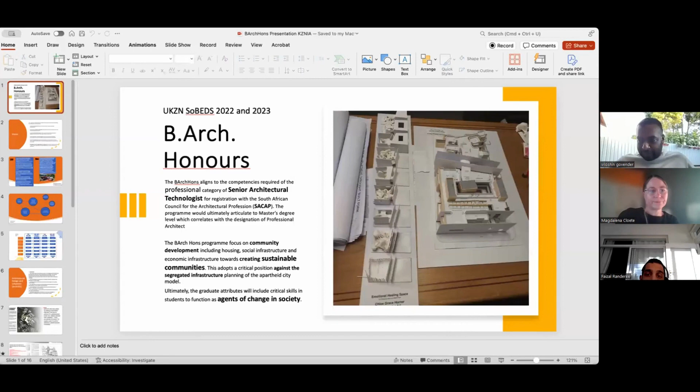Can everyone see this? Yes. Thank you, I'm sorry, my dogs are barking in the background. Good morning, everyone, it's nice and early on a Friday. Just to introduce this, we developed a program for honors before COVID, and then we were able to implement it in 2021.

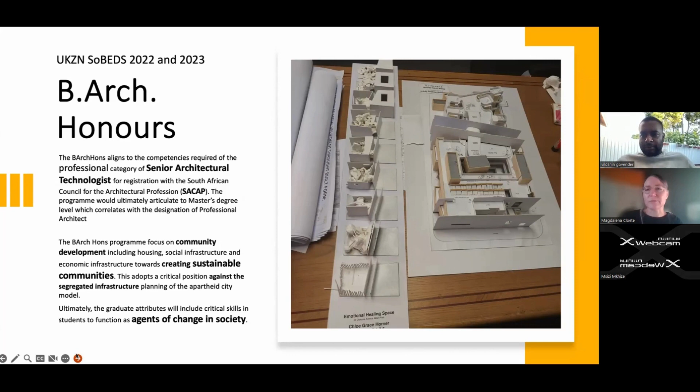I think what stands out with this program is it's got a very distinct research-driven approach, as well as trying to work towards sustainable communities and also preparing students for becoming agents of change in society, so not just being an architect that makes money, but actually creating change.

So the vision of the program, looking at all the modules and seeing how we fit into the university - African scholarship is quite a strong element at the university. So we encourage research, we look at literature and policy, we support critical scholarship, we promote access, specifically trying to accommodate previously historically marginalized communities, not just in access to the university, but also how we engage with them.

We promote collaboration, and most recently we collaborated with the city architects - not just the city, Mile and other people in the city - as well as working with some of the engineering programs. And then I think it's about being innovative and finding new ways of engaging with our built environment and trying to work towards that bottom-up approach that Villa was talking about as well.

So this is a little bit more - it explains how we work, and I think one of the main things is that it's not us teaching students, it's very much we learning together, learning with our communities, learning through research and finding the information out there and bringing it back. Quite often students would use what we call a flipped classroom, where they present the work to each other, so it's definitely not a lecturer-centered approach where we are always teaching them - we teach each other and we learn through that.

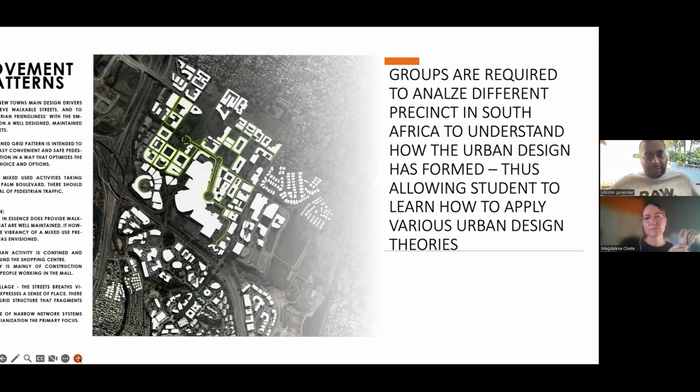Then we start splitting them into further groups when we give them a site area, and we start mapping at various scales. What we found is that mapping at various scales allows the student to understand the context even better, from macro, meso, and micro scales.

Some of the contexts we've worked in are the Point Precinct, Warwick Junction, and Giba Gorge. Now we're doing West Town, which is interesting because we're looking at a developer-driven approach to creating a city, allowing students to understand that approach and shape the city to what they think is correct. We're doing this in collaboration with engineering students, and at the end we'll probably invite those developers to studio to show them our approach to urban design, and contrast the pros and cons of both.

The mapping at various scales allows us to critically analyze context and get information which is often secondary, but we mix it also with primary research by doing transect walks. This information is useful because it also forms part of the body of knowledge which we can publish about our city.

From these mapping exercises, we get something called the design drivers. After they collect the data, it's important that students realize how this informs design. Design should be informed by the drivers that come from the research, and it's not something you download off Pinterest or find online. It's really context-driven, responsive design solutions.

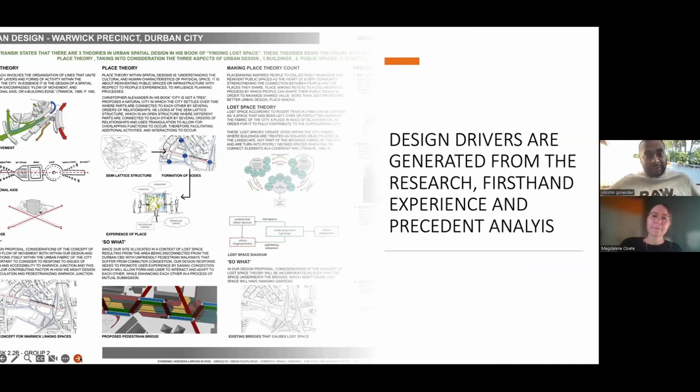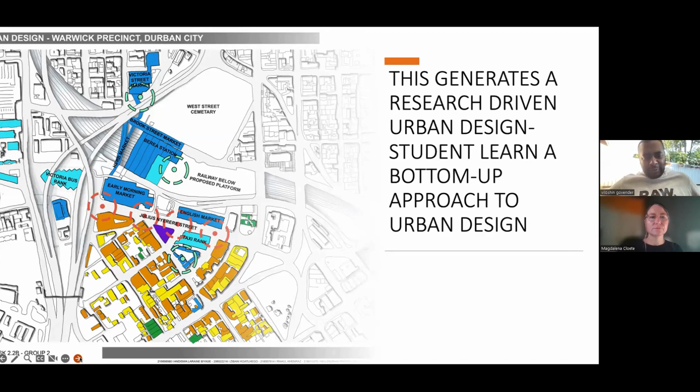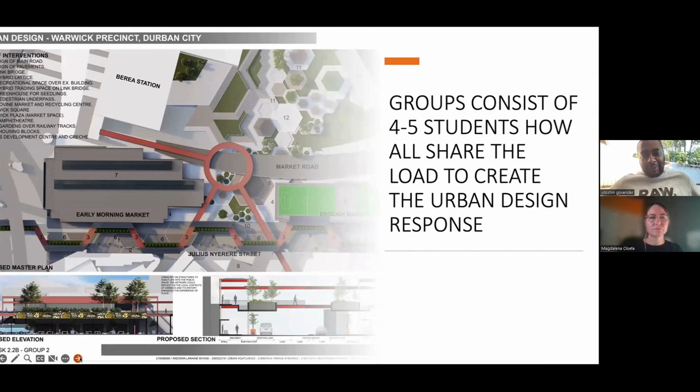Then the students use these bottom-up approaches to design an urban intervention. This is done in groups of 4 to 5 students, and they create urban interventions for the context. Some of them are quite broad and quite big interventions, but we allow them to explore and try new ideas.

And this is the urban design—some examples of when we were working in Warwick, and some of the solutions they came up with.

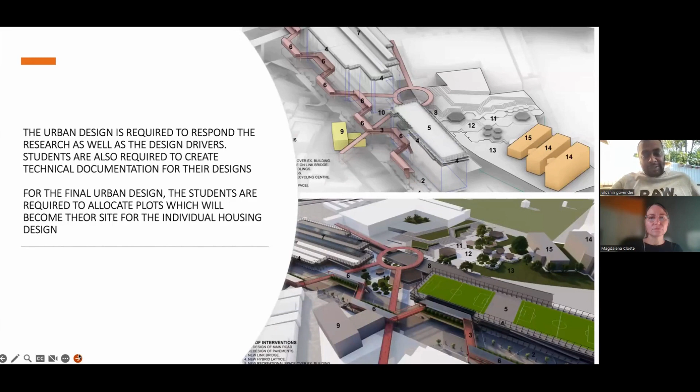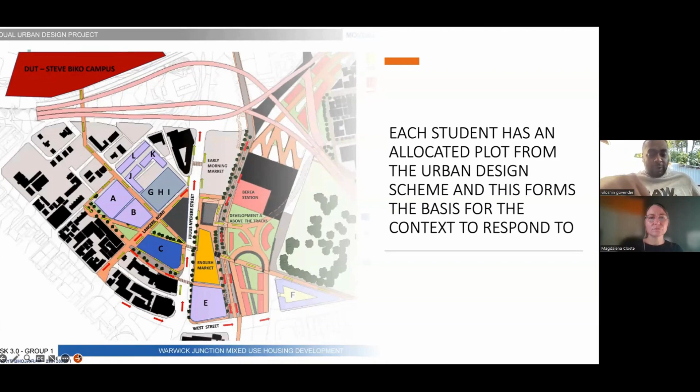From this, the students have to design their own plots. What happens is these plots become the individual response they take forward as the next project, where they do a housing solution on the plots they've designed. The individual design refers back to the urban design they've done as a group, and uses the same research and synthesis found from those solutions.

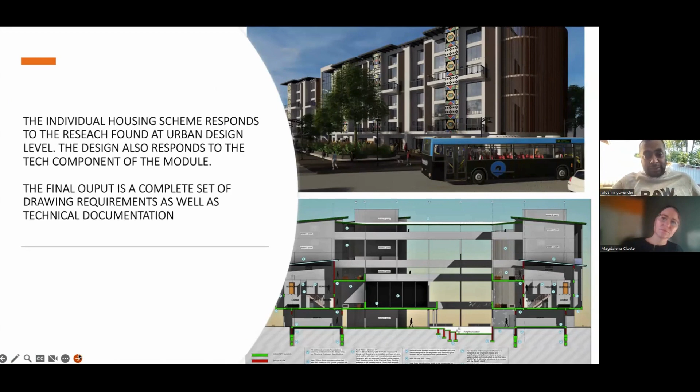The part-time class also follows the same kind of program, but we spread it out over 2 years, because it's part-time.

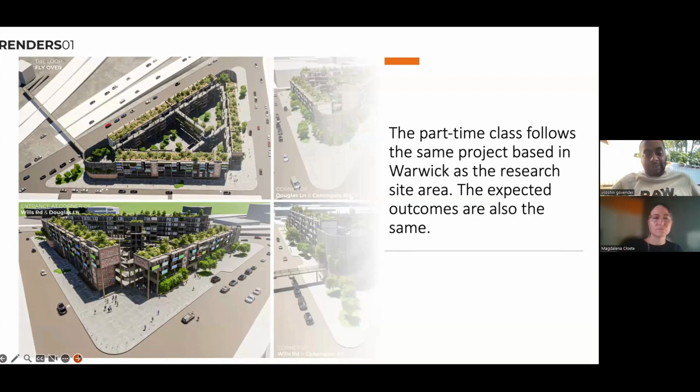Before we move on, I just want to quickly talk about a specific project. Some of our younger architects came through the Masters 1 program—Vilo, you also did a very similar project, which Dr. Bridget Horner had started. The focus was very much on how you engage, not to always just read up; as visual people, by drawing plans by hand, you learn so much more. I inherited the project from Bridget, and we've integrated it into this new program. This year Vilo joined me in the module—it's part of the history and theory of architecture and urbanism course.

The focus this year is on African cities, but we've approached it in different ways. We'd focus on, okay, it needs to have a water's edge or a strong connection to a river or something like that, and then start to look at how the city developed in relationship to that. In African cities, the colonial influence becomes quite strong.

Through the mapping you will see what they've done. Those of you who have been to the Institute and looked at the drawings would also enjoy that. The last 2 years, Rodney Harber was our external, and it was amazing—the first year he joined, he'd been to all the cities and could really engage so well with the students. I miss him when we do this project now.

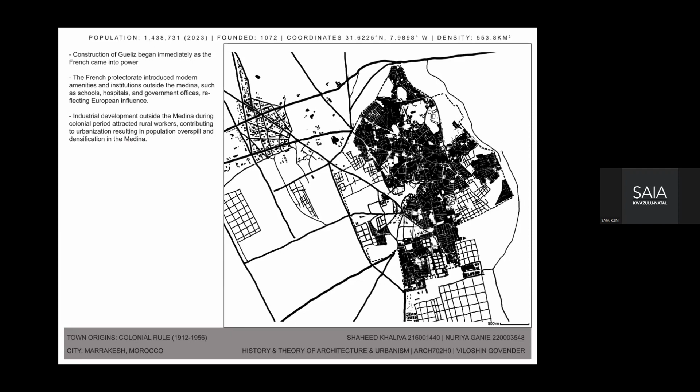Moving into the colonial era: the French introduced modern amenities within the Gueliz, such as schools, hospitals, and government offices, reflecting European influence. The regulations the French put into place restricted development within the Islamic city center, creating lasting segregation between the French and Islamic communities.

That segregation is evident in the contrast between the organic Medina and the very ordered spatial structure of the Gueliz. The urbanization and industrial development taking place just outside the Medina attracted high volumes of rural workers from other parts of Morocco, creating severe densification and population overspill within the Medina, resulting in housing shortages. In response, much of the farmland along the Medina perimeter was converted into informal housing areas known as douars by the big landowners at the time, which further exacerbated social stratification.

Within the early stages of Moroccan independence, much of the focus was placed on restoring and developing the countryside. During the modernization era, there was major infrastructure expansion as well as modernization within the Medina, aimed at encouraging more tourist attraction, converting many homes into hotels and more commercial services. This also came as a result of that population spilling over into the west.

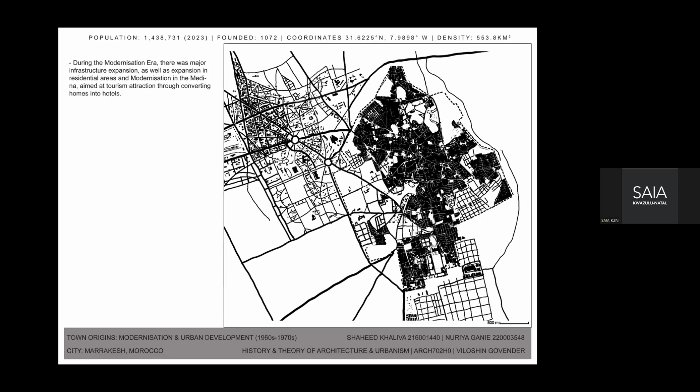During the globalization and modern era, that development towards the West becomes more apparent. Despite the creation of a new town at the fringe of Marrakesh, the urbanization front begins to develop from north to south. Within the Medina itself, you get problems of traffic congestion and social issues systematically undermining both the centrality and attractiveness of the historic core as a place of residence and tourism.

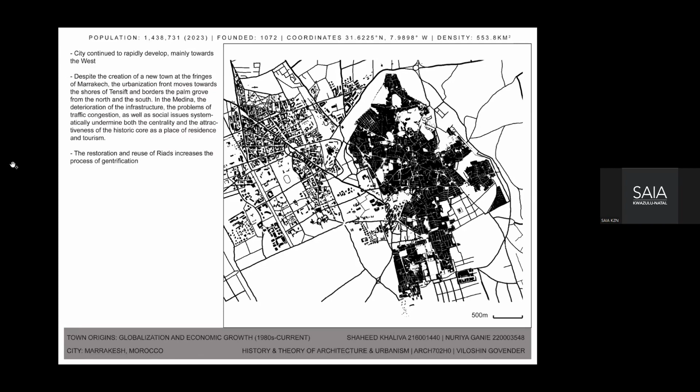With the establishment of French rule came the implementation of basic transport infrastructure such as roads and railways, primarily for strategic and administrative purposes. The expansion of the road network begins to show the apparent influence of French urban planning, contrasting the Medina, with the introduction of motorized transport into the center also further influencing urbanization of the Medina.

The Gueliz expressed this radial road formation, with the roads used as linking devices between public nodes, which is a general characteristic of French urban planning.

Towards the 60s, you get rapid urbanization of the Medina, which created severe traffic congestion issues within the city as a result of there being very minimal circulation beyond the confines of the ramparts. Whereas the Gueliz experienced not much development in this time period, as much of the road network was already basically established at this time.

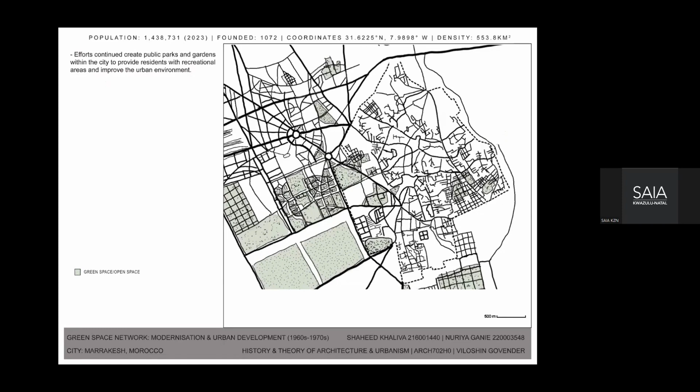In order to further improve their urban environments, more efforts were made by creating public parks and recreational areas for the residents within the city. You also see the emphasis on rural development through agricultural land, as expressed by the map, where you see large areas of agricultural land in the lower areas of the Gueliz.

Moving towards the modern era, you start to see these gardens within the Medina become reduced in order to facilitate more accommodation and tourism. So the focus on green space now becomes more apparent on the outside of Medina, where parks become integrated within commercial and residential zones, becoming more of a beautification for tourist areas rather than for the actual residents. So it's further emphasizing the result of globalization within Marrakesh.

We concluded by isolating the town grain alongside these sketches to explain our interpretation and emphasize our findings in this presentation. The clearest point is the drastic contrast between the very historic Medina and the French Gueliz. Marrakesh itself boasts a very deep historic background with clear Islamic influence, as seen in the Koutoubia Mosque, which was built in 1150 and continues to stand as a historical landmark.

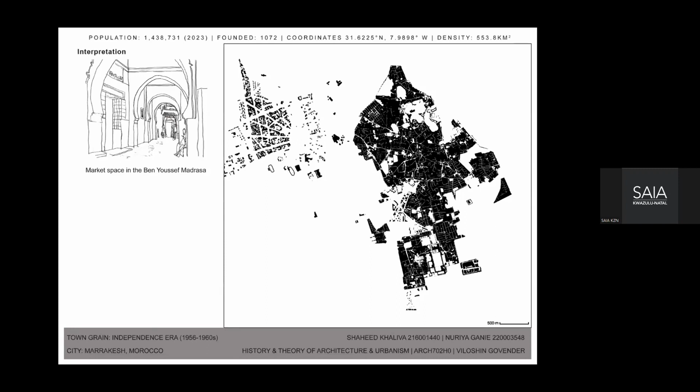Over time, the structured French urban development continued to influence Marrakesh, almost as a contradiction to their own cultural identity. Their response to the density of the Medina is what allowed them to create these iconic spaces, such as the market space in the Ben Youssef Madrasa, where you further see that Islamic identity through the use of arches and colonnades. Then towards the 60s, you start to see how the grain develops.

The Gueliz became more structured and rigid, with all development taking place on the outside of the historic Medina. In a way, this might have preserved the history of the Medina, if not for the severe globalization placing emphasis on tourism generation. So these historic cultural spaces start to become symbols.

That's something unique to Marrakesh itself, whereas the Gueliz is a clear contradiction to that history, showing the influence of French urban planning with clear lines and strong radial linkages. Whereas the Medina fully represents Marrakesh's historic background, it's that harmonious balance between the two that symbolizes what Marrakesh is today. Thank you.

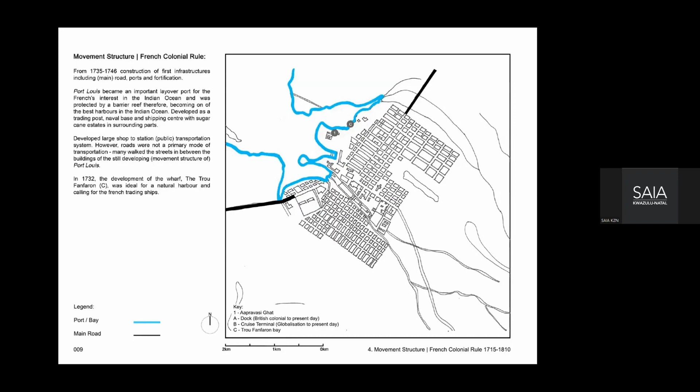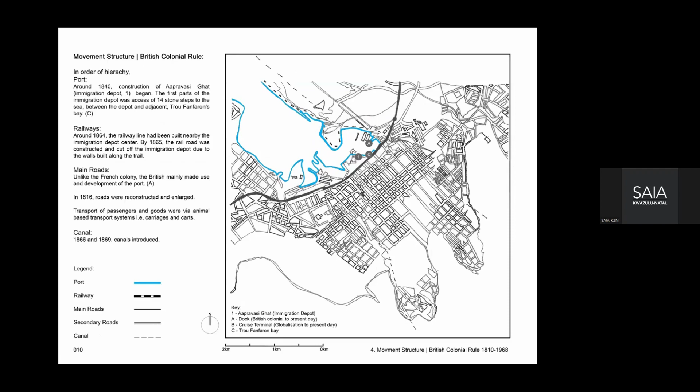Like the other groups, we're going to go on to movement structure. During the French ruling, movement was predominantly pedestrian friendly, not much growth. During the British ruling, other networks developed considerably, including roads, railways, canals, the port, and most importantly, adjacent to the port was the immigration depot.

Post-colonization, there were significant efforts in the development of the road network due to the introduction of motorized vehicular movement. Due to the growing significance of trade and commerce between Port Louis and its surroundings, rail networks developed as well, as an alternative to the port. Throughout history and present day, the port will remain of utmost importance.

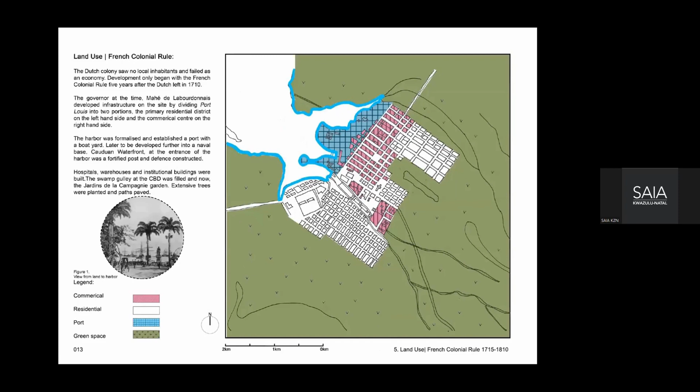Moving on to land use. The French and British, as you will see, similarly divided the city for residential to be on the outskirts and make use of the sloping land, and for the inner city where the flatter land is to be for the port, closer to the port for commercial.

In the British colonial rule, the city's layout was formalized specifically by Professor Thornton White's master plan, and introduced land use for the industrial area as well.

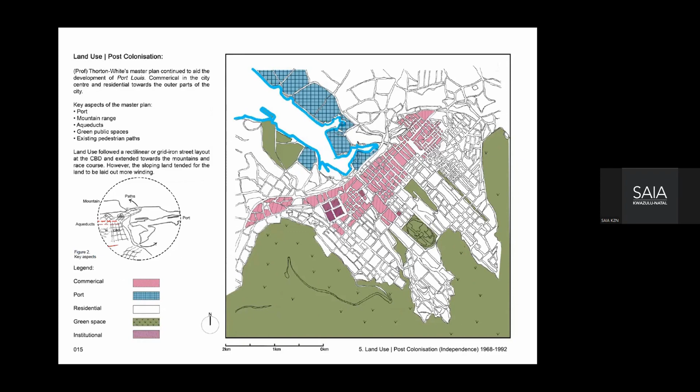Professor Thornton White's master plan continued to influence the city's layout as it developed into more of a gridiron pattern. The layout was influenced by significant and natural elements of the city as indicated by the sketch, namely the port and the mountain range.

By globalization and present day, the land use has become more traditional in the efforts to minimize the need for any or an abundance of mixed development. There is a lot of importance placed onto the green spaces being preserved, so there are pedestrian-friendly interfaces in the city.

Moving on to green network spaces, as previously mentioned, there was no significant green network during the Dutch colonial period. Port Louis's green space network slowly started to emerge during the French colonial era. Recreational amenities began to formalize and continued to develop.

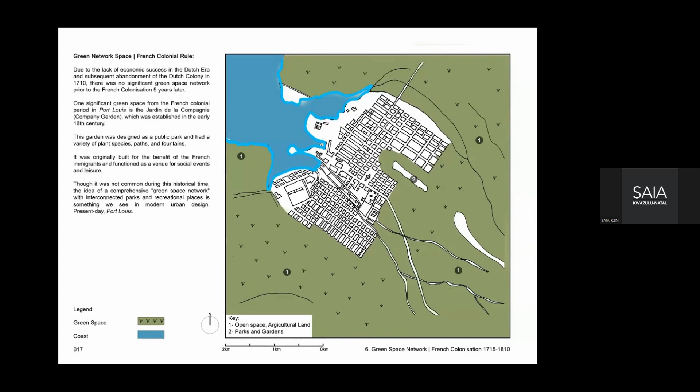With the rapid development of Port Louis during the British colonial era, there was significant removal of green spaces to accommodate urbanization. Simultaneously, conservation initiatives began to flourish.

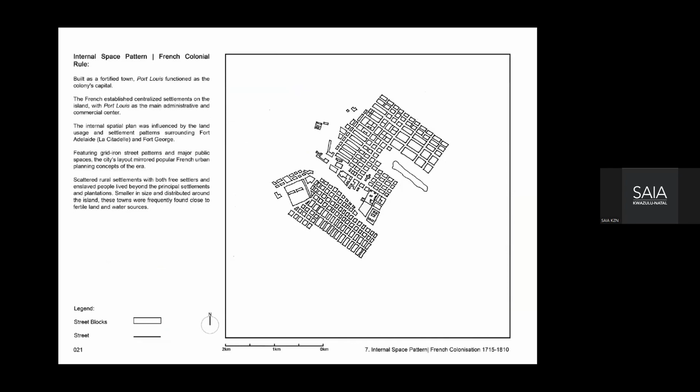Initially, Port Louis was built as a fortified city with a commercial core, practicing the gridiron street pattern introduced by the French. Rural settlement began to develop along the outskirts of the city, once again depicting hierarchy of a fortified city.

During the era of post-colonization, the city started to become highly populated, once again still maintaining the gridiron pattern. Existing recreational among other facilities began to redevelop.

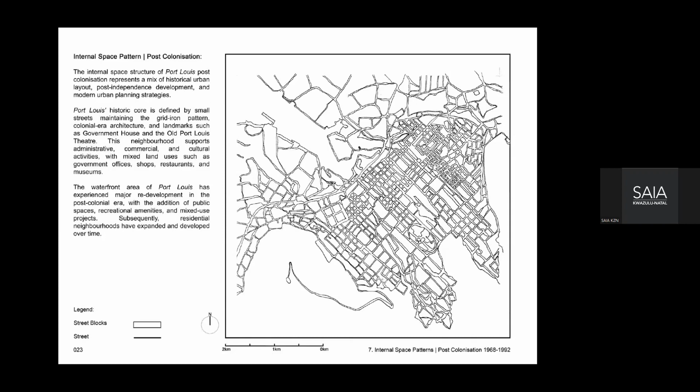Globalization drew investment to the city, allowing further redevelopment to occur. Modernized buildings began to emerge as a result of this economic change. One major factor that can be seen throughout this era is the gridiron pattern, which was maintained, and only impactful redevelopment occurred.

Now moving on to town grain, as mentioned, Port Louis was a fortified city. Therefore, many architectural features were developed to enforce this fortification, while observing a variety of land use initiatives to help generate economic activity.

Improvement to the city's infrastructure began during the British era, alongside new construction of roads, bridges, and public buildings. Due to the rising population in this era, residential areas expanded significantly to accommodate this.

Tourism began to emerge, causing economic growth for the country, resulting in the construction of hotels and recreational amenities near the coastal front. A large portion of the infrastructure at Port Louis after globalization is situated to accommodate tourism.

Following the timeline, the Dutch built Port Louis's first basic infrastructure, including small ports and agricultural facilities, but faced limited development due to their brief presence. The French built more infrastructure to support the sugar industry, including roads, irrigation systems, and larger plantations. The British continued to improve infrastructure, focusing on transportation and communication networks, connecting sugar plantations to ports and towns.

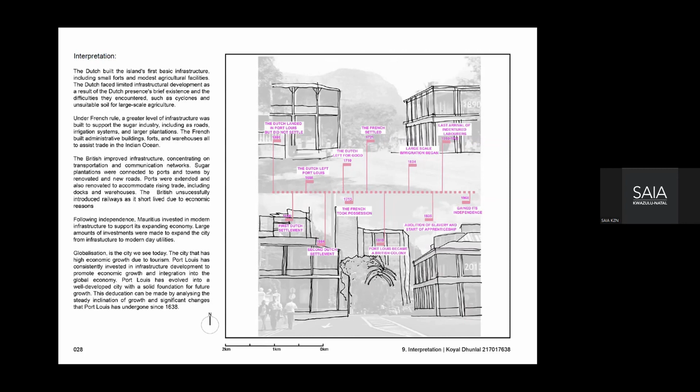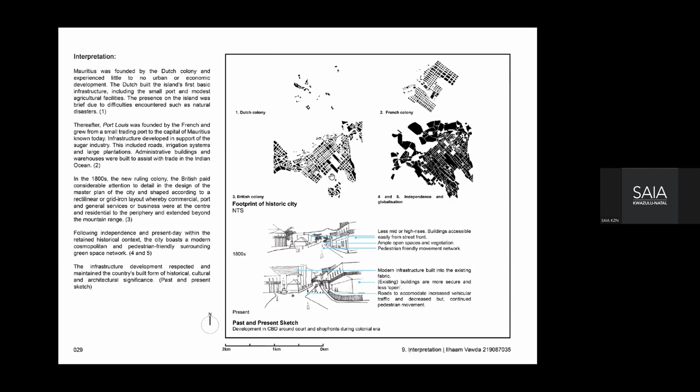Illustrated by the comparative sketches, Port Louis' evident investment in modernization has supported the preservation of its existing significant and historical infrastructure, such as the court or statues and other important artifacts that have been laid out in the city. Port Louis is now developed into a cosmopolitan and tourist hotspot that we know today.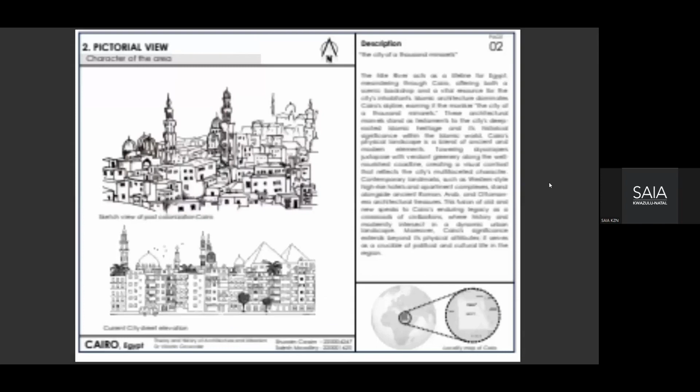Looking at the pictorial view, you can see that Islamic architecture was quite prevalent within the city, and I think it's been referred to as the city of 1,000 minarets, which are these long tower structures where the call to prayer is made for the mosque. This blend of contemporary and traditional architecture makes for a very interesting cityscape, which is quite fascinating about Egypt as a whole.

Starting off with town origins, during the colonial period, the British and French developed Cairo's urban fabric according to a familiar European style through grid patterns and strategic planning. This change was different compared to the more organic layouts based on location of resources used in ancient times. During the colonial period, the grid structure created more public spaces due to the lack of urban density.

As time went on, the urban density continued to grow, creating more housing and job opportunities within Cairo. For this reason, many people from the surrounding districts and towns moved towards the city. With independence came a more modernist approach, thus still following some of the Eurocentric trends.

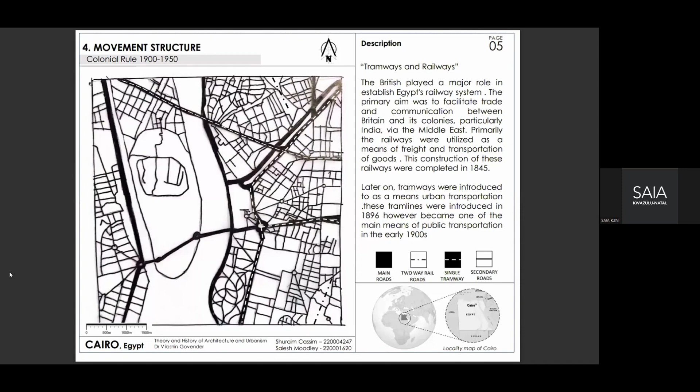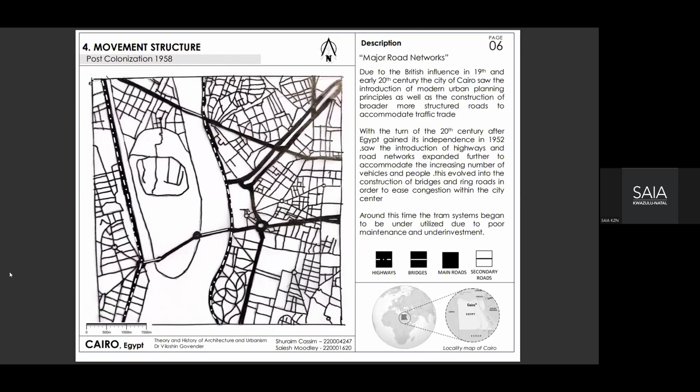Post colonization, the roads began to get more formalized and widened to accommodate this growth in population. Moving on, the globalization period in the early 2000s marked the introduction of the ring road, which connected the entire city together.

Due to space constraints, buildings started moving into high-rise typologies, and I think this also applied to the road networks, with elevating, looking at bridges and tunnels. These roads were developed and got more formalized and widened to accommodate the influx of people coming into the city. Now currently there's a movement to prioritize public transportation and walkability within the city, and that's where we are now with the current movement structure.

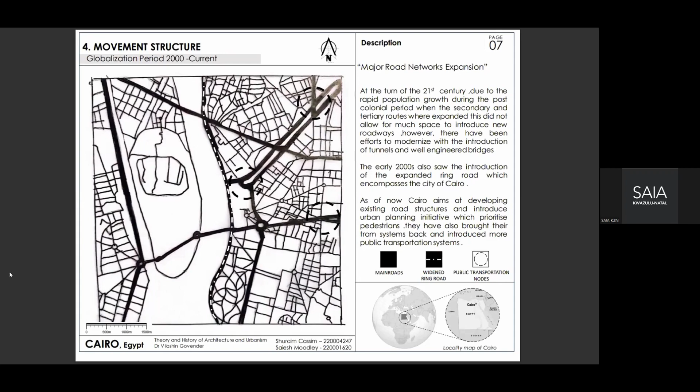So looking at land use and zoning, as previously stated, the colonial rule involved creating facilities that were more prominent in the European context. Many of these facilities were developed along the Nile for easy access and control. This created inequality, as the areas of resources were developed more for the wealthier ethnic and social groups.

Continuing through the post-colonial period, the urban landscape remained the same. During this period, Cairo and Egypt in general went through economic stagnation due to changes in government and other political influences. Building density moderately increased around the Nile, yet the surrounding areas were not developed further.

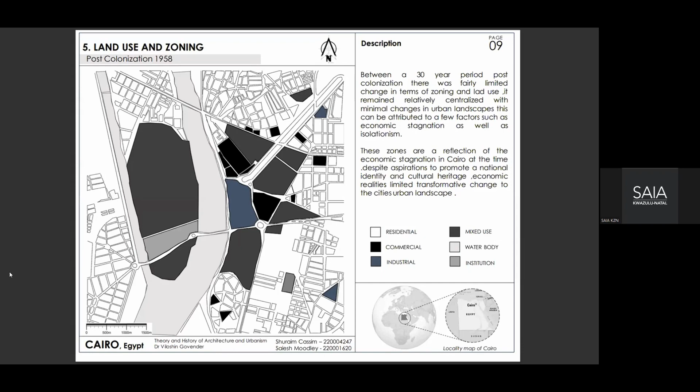A more liberalized approach was taken during the globalization period, allowing for the economic reforms the city needed. This further increased the zoning towards mixed use and commercial zones to cater for the population influx.

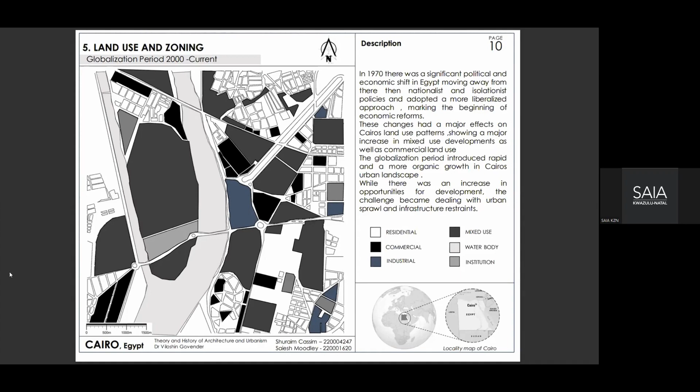Looking at the open and green space networks, it's quite an arid climate. However, around areas where the British were situated during the colonization period, there were prominent open spaces such as the Garden City, which were quite luxurious, developed and landscaped. You'd see these more clustered spaces where the locals resided, which were not developed in terms of greenery and things like that. I think the greenery was a reflection of the class at the time.

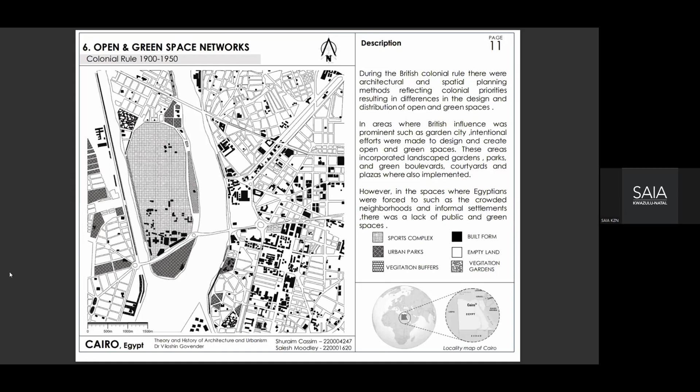Moving on to post colonization, I think there was a movement to reclaim the city by the locals. As such, new green spaces were introduced, designed to reflect the culture of the people, bringing about a sense of identity.

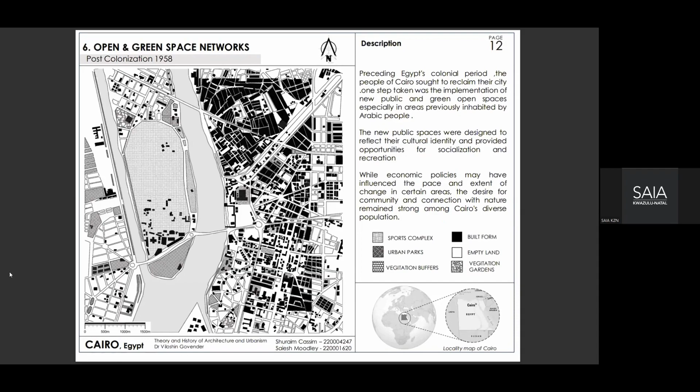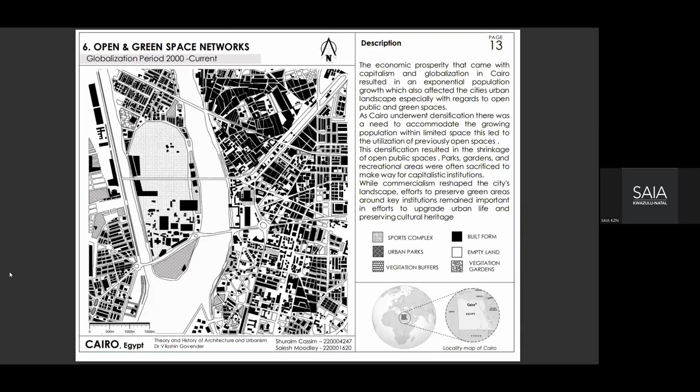Now looking at the globalization period, there's almost like a reverse process, because due to rapid densification, the open spaces that were previously available are now being developed on, hence reducing the amount of open space we've seen previously.

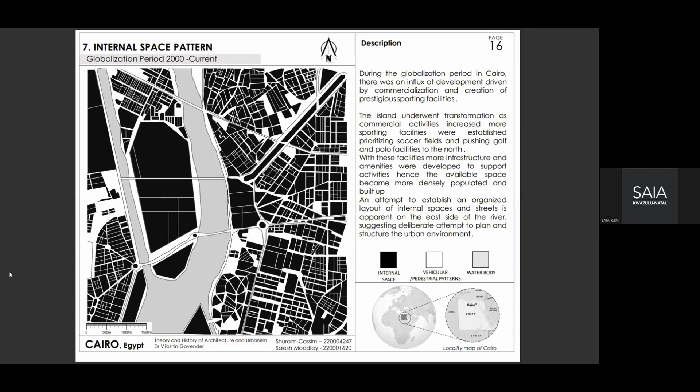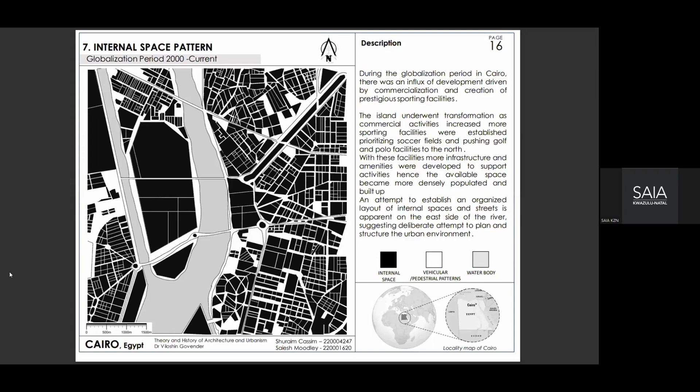The continuous growth furthered the process from the post-colonial period into the globalization period. However, exhibition, cultural spaces, and sporting facilities were given some sort of priority, creating more amenities within the densification. The future plans of the city show an attempt to create an urban environment not only good enough for people to live in, but good enough for them to live in comfortably.

Around this time, another significant building took place: on the island across the Nile there is a sports precinct that came into play. I think this was quite significant at the time because the locals struggled to find an identity, and although sports was played, it was golf, polo, nothing that really reflected the local culture. Then by introducing this sports precinct, soccer was introduced, and that helped develop the city.

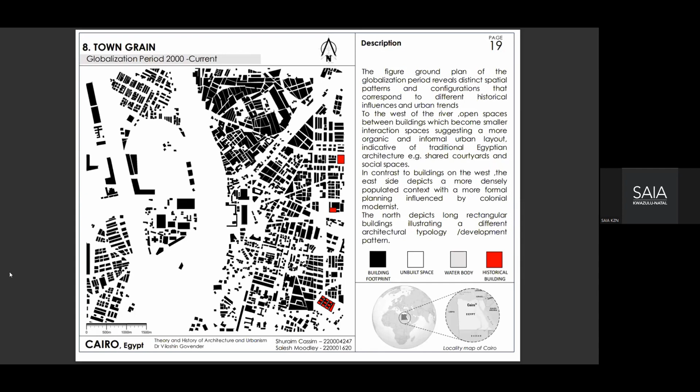If you look to the west, you see the informality taking place due to this surge again in population, the exponential growth taking place. Again, you see to the east the densely populated formal areas, and to the north the longer mixed-use structures that came into play.

Cairo is a city that has undergone constant progression. It's experienced rapid urbanization and population growth, leading to the city's expansion beyond its historic core. Suburban developments, high-rise buildings, as well as infrastructure projects have transformed the cityscape. However, challenges such as traffic congestion, informal settlements, and preservation of cultural heritage have emerged as key concerns in contemporary urban planning efforts. Throughout its history, Cairo's urban design reflects a tapestry of cultural, religious, and political influences, contributing to its status as one of the world's most historically significant cities.

And that ends our presentation of Cairo.

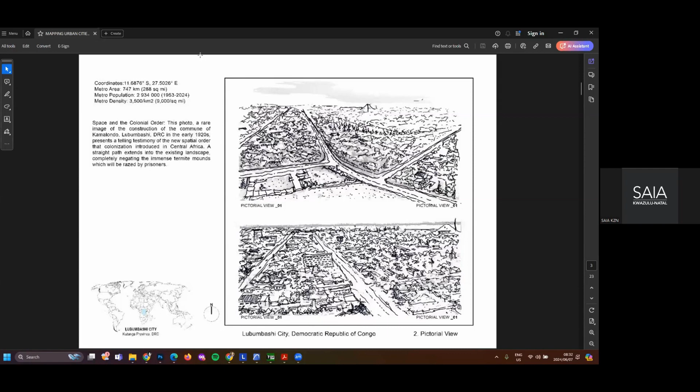As the history of Lubumbashi... you're very faint, Mashuda. Come closer to the mic. Is it much better now? Yes, that's good.

As you've heard regarding the historical influence on Lubumbashi, it was founded by the Belgian king and comprised a copper and cobalt mine. That's what made Lubumbashi so well known by people around the country as well as those beyond.

As the colonialists came and dwelled within the vicinity, a man named Emile Wangermée arrived in 1910 and proposed a structural grid that they wanted the colonialists to dwell in, and she called it a white haven. That's what she said, as I quote. And then there's the name of this camp.

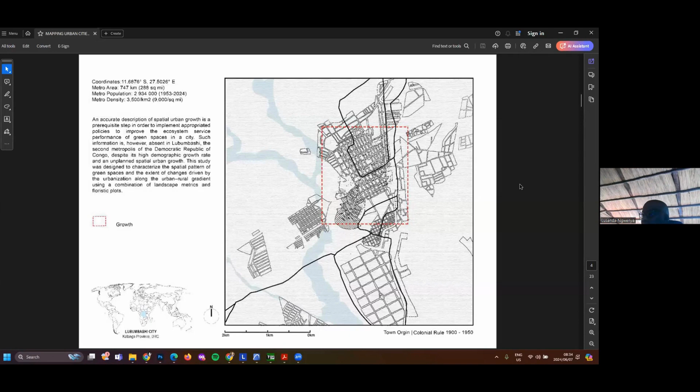As Lulanda mentioned, Lubumbashi is comprised of communes in the form of camps, and one of the names of these camps is called the Garden Court itself. What I've hatched here is the Garden Court's rigid setup.

As time went on during post-colonization, when Lubumbashi started gaining its independence, our king wanted to regain authority of one of his spaces of land. This space, which I've highlighted here, was actually taken first by the colonialists via law. So the law is what overpowered the natives of the land.

As a result, the urbanists continued developing their spaces down here towards the south. And as you can see during post-globalization, time came to a bit of a halt as peace was thriving within the area.

Lubumbashi is also known for its vibrancy of color and culture and social cohesion with the people. As time went on and liberation came about, the natives of the land began to adapt to the structural grid that Emile Wangermée proposed within the vicinity. Towards the north outskirts and northeastern outskirts, there was a combination of rigidness and organicness because the natives attempted to replicate what Emile Wangermée wanted to bring to the vicinity.

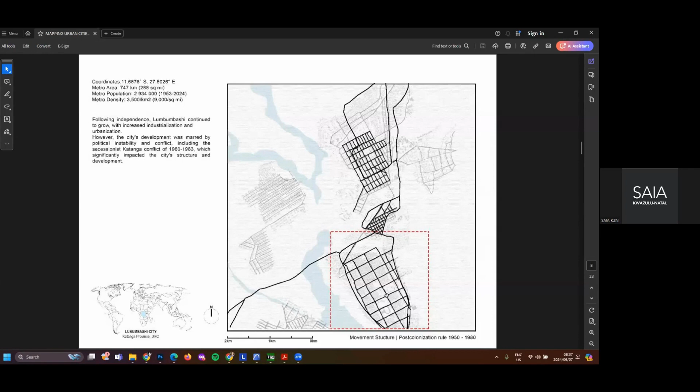With that mining activity and trade activity, it sprouted a lot of visitation around the space. As a result, the expansion of the roads became quite rapid within the vicinity. Lubumbashi also comprises about 85% residential buildings in comparison to civic and commercial structures. And this is the post-globalization map.

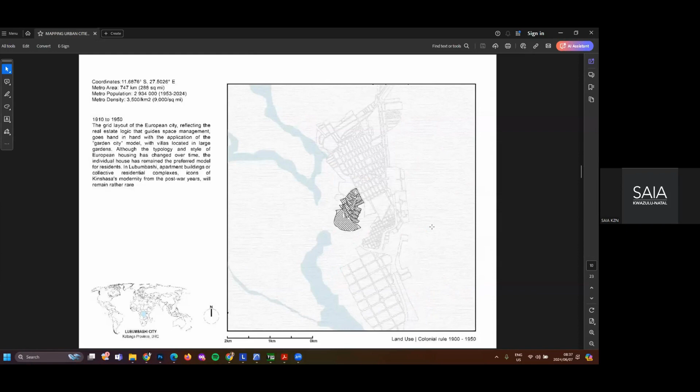Coming down to the land use: starting off at 1910 with the mining space — this is basically where it started. Then it spread over, up to the north, coming down to the side. As you can see, it's heavily densed by the garden city.

And then the second attempt of the garden city going down to the south, as you can see that it became heavily densed. But this was now a mixture, not just of the colonialists, but also the natives of the land. Those natives who were staying within the vicinity mainly were those who were helping within, doing the services, like your slaves at the mines and all of that. So they were basically workers of the space.

And then there were some commercial slash civic buildings that started developing around the space, around the residential spaces, as well as your industrial buildings all the way up to the northern outskirts. But these industrial buildings were also comprised with residential as well, so they were a mix of two.

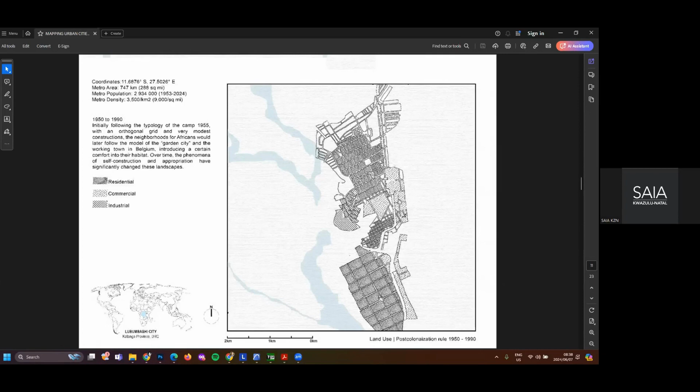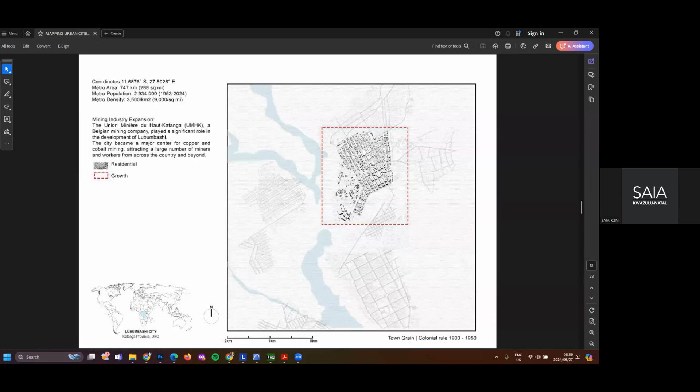And then this is, of course, your post-globalization as well. And then this is just initially the town grain, looking at how the movement structure kind of influenced the figure ground now of the vicinity of the space. I will just point out again that this is the start of the mine, and this is the introduction of this vicinity or this garden city space within the center of the city.

And then this is post-colonization. Once again, the rapid growth between the south as well as the north. Once again, the north comprised a little bit of industrial as well as residential, so it was a mix of two. And then you have your post-globalization.

So why I'm highlighting also towards the north and the northeast, these two red squares, is just to indicate that with this globalization, what had happened is because of the vibrancy of the natives of the people, there's a lot of positive activity, like towards social cohesion. This multicultural thing that they wanted, instead of this segregatory towns that Emily Wangabi had created within the space.

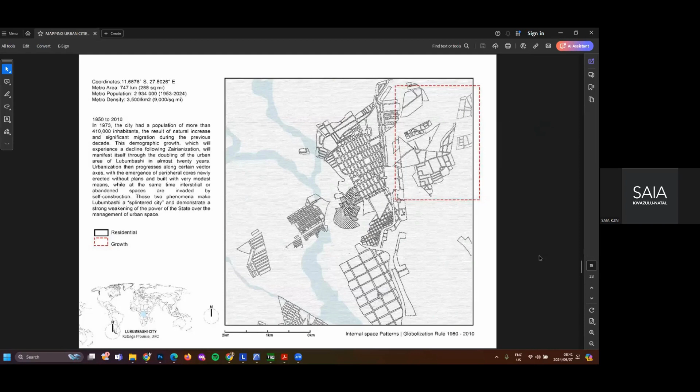And then we also have our king Lubumbashi, who was very much into the agricultural life of their natives, because the natives that lived there, the things that they were eating and planting, they were very much into the agricultural lifestyle. So there was one emphasis in terms of having to preserve his lifestyle, his agricultural lifestyle, because he talks about preserving the footprint based on ancestral worship, as well as ancestral places where they would have their prayer times, or where they would bury their ancestors and all of that.

So a lot of this agricultural land itself was used for a lot of these sacred things that people of Lubumbashi did. So Lubumbashi is very, very heavily densed, and it really preserves its footprint. So as you can see with these internal spaces, how much of this bushy vegetation just hugs the space.

And then there was no attempt inside Lubumbashi to open up places like your parks, because of its bushy vegetation. A lot of the things that Emily mentioned were walking trails, things that were created during the colonial times. So all of those things were actually leading them to the vicinity of the forests around there, because there's a game park right around the northern vicinity of the city itself. So she mentions a lot about game parks.

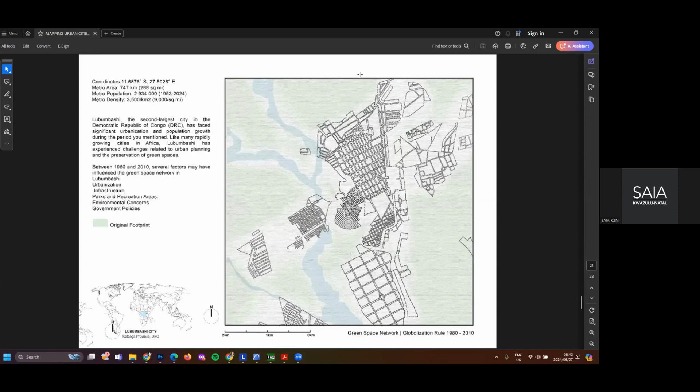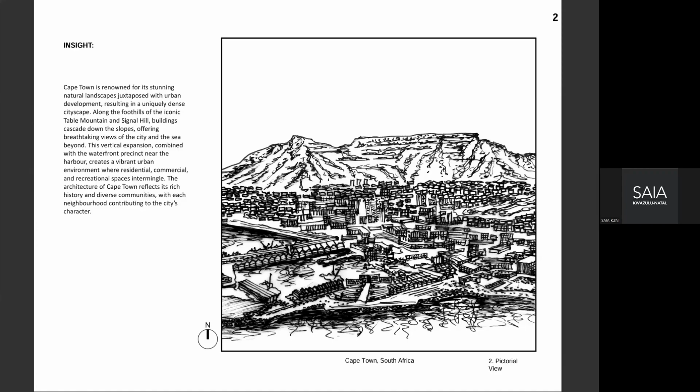The time of forced removal saw massive industrial growth along the coast, in addition to new residential buildings along the base of the mountain, as a result of a growing population at the time.

Finally, in the globalized period, we see the city as it is now. We can see the expansion of the recreational zone along the coast on the west of Cape Town as a result of the 2010 FIFA World Cup. Multiple revitalization projects also occurred during the globalized time. Overall, we see a densification of the urban fabric, in addition to even further growth of the ports, for the purpose of being able to fully integrate the port into the global market.

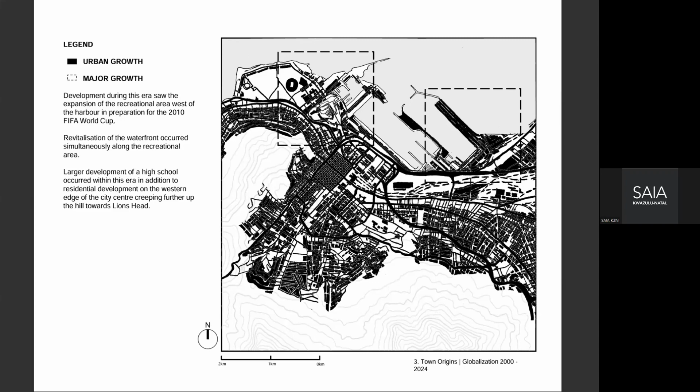During forced removal, there hadn't been much change except for newer developments on the outskirts, which now needed smaller roads to accommodate these. You can also see how, up the mountain, these roads become irregular and start conforming to the topography rather than the strict street pattern. This is similar in post-colonization, except for the new additions of smaller roads to accommodate the city buildings on the city outskirts.

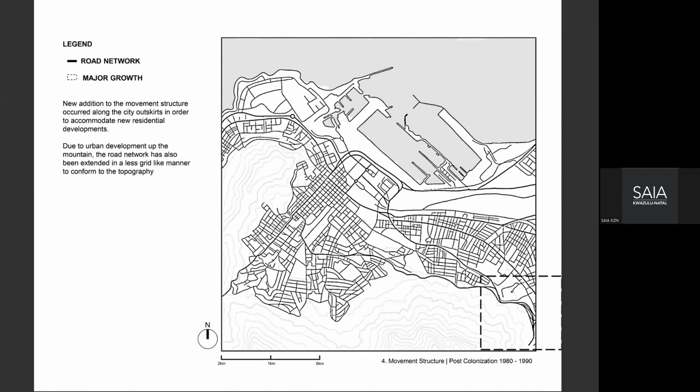And in the globalization era, there hadn't been much change except along the city periphery, as well as small areas to the west of the port to accommodate the trade and growing economy of Cape Town. We also looked at the land use and zoning of Cape Town.

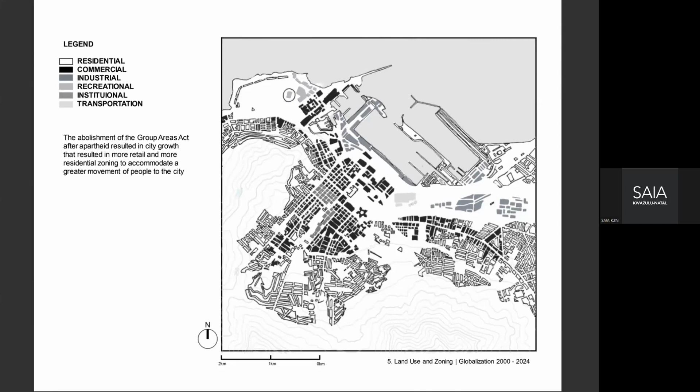We then looked at the green space networks. You can see that urban development in Cape Town has almost morphed around the natural bushveld, which is the mountains. The bushveld is essentially the untouched areas, while the green spaces are constructed green spaces like recreational areas such as playgrounds and parks.

In the globalization era, this period had seen the biggest jump when it comes to constructed green spaces within the city due to the strong sustainability and green city movement. The bushveld also had seen more encroachment due to population growth, but these buildings and developments again rather conform to the terrain.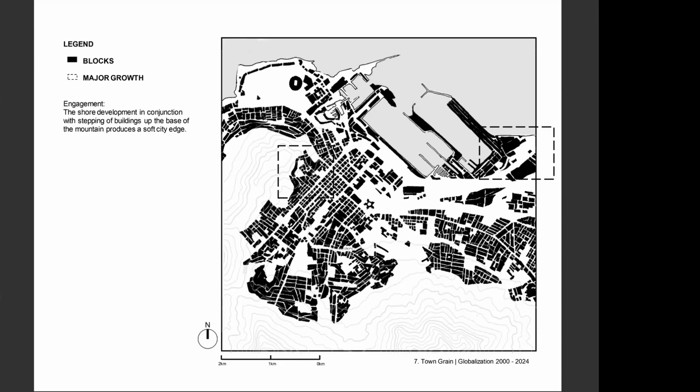We then looked at internal space pattern. This makes it a bit more clear that you can see this strict grid iron street pattern, as well as how it starts to dissipate up the mountain, conforming to irregular shapes and the topography.

It's similar in this area as well. The most notable area of expansion was the growth up Devil's Peak and Signal Hill. This area also saw the development of transport routes such as the train station and railway to accommodate the population as well as the growing economy.

The post-colonization era developed many transport routes to facilitate movement in and around the city, also to facilitate the growing economy. As I mentioned before, trade had become very popular in Cape Town and had developed as well as the port.

You can also see how there had been a lot of development start moving inland and conforming to the topography.

In the globalization era, there were very minimal changes, but it mostly shows what I mentioned before, that because of the overpopulation, this grid iron pattern was almost impossible to conform to. So they decided to move inland and up the mountain, and you can see all the new development is very irregular.